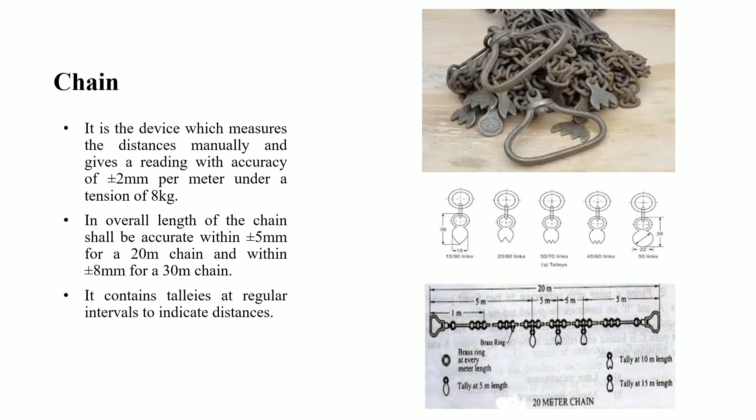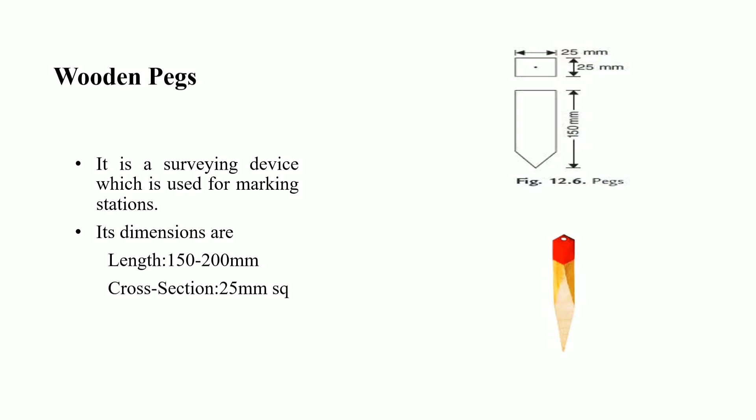It contains tallies at regular intervals to indicate the distances. Next, we will move towards wooden pegs. A wooden peg is a surveying device which is used for marking stations. Its dimensions are length 150 to 200 mm and cross section 25 mm square. Next is arrows. They also help to mark the stations. They are made of 4 mm diameter steel wire and the length is around 400 mm. A ring is present at the end of the arrow which helps the surveyor to drive it into the ground.

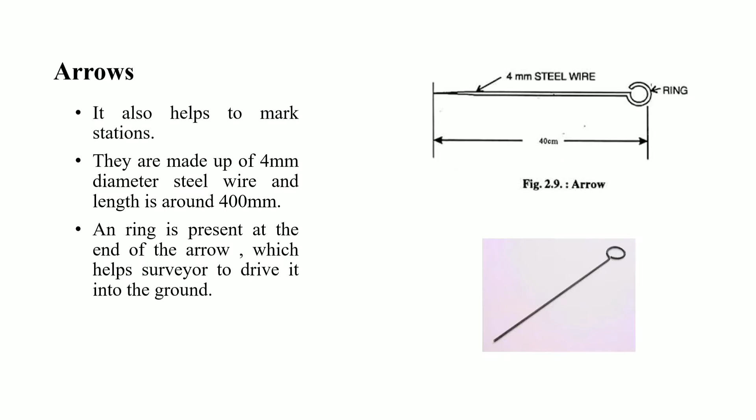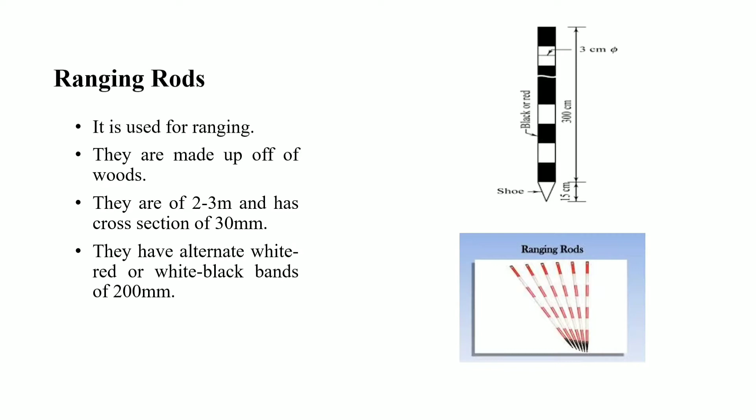Ranging rods. They are used for ranging. They are made of wood. They are 2 meters to 3 meters long and have a cross section of 30 mm. They have alternate white-red or white-black bands of 200 mm. Next is ranging poles. They have the same purpose as ranging rods. The only difference between the ranging rod and ranging pole is size, as its length varies from 4 meters to 6 meters and its cross section varies from 60 mm to 100 mm.

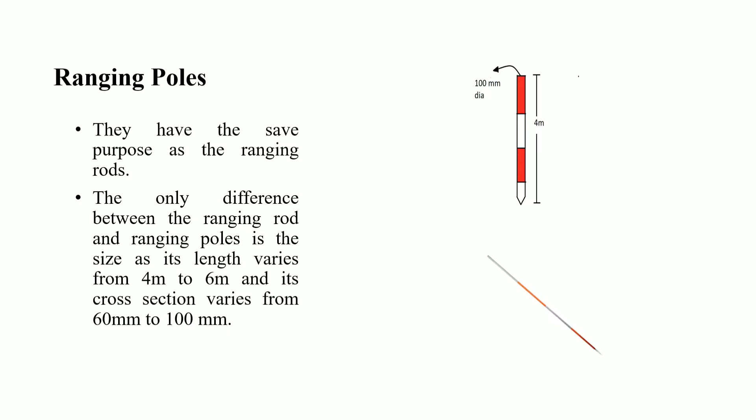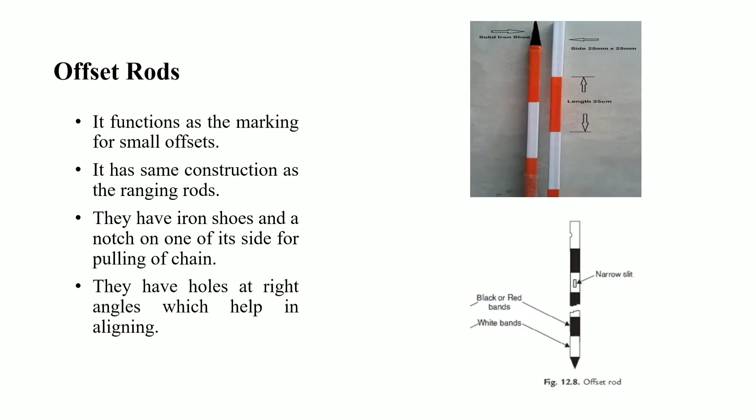Next is the offset rod. Its function is to mark small offsets. Its construction is the same as the ranging rod with minor differences. They have iron shoes and a notch on one side for pulling the chain. They also have holes at right angles which help in aligning. It means when we align the ranging rods with a particular offset rod, we have to look through these holes so that we can get proper alignment.

Then we have laths and whites, which are the last component of chain survey. Laths and whites are generally used to mark the ends instead of ranging rods and are made of soft wood. They help to mark the endpoints, that is the end stations. Generally, the length of laths and whites is around 1 meter. Whites also serve the same purpose as laths. A groove is made at the end of the laths and whites so that a paper can be inserted into it for proper visibility. With this, the components of chain survey and their uses end.

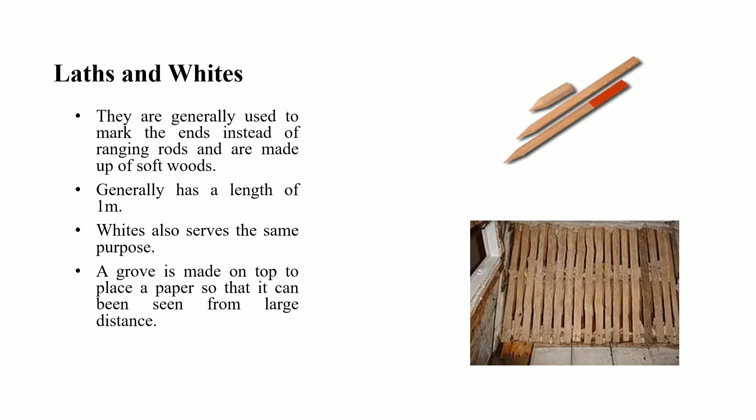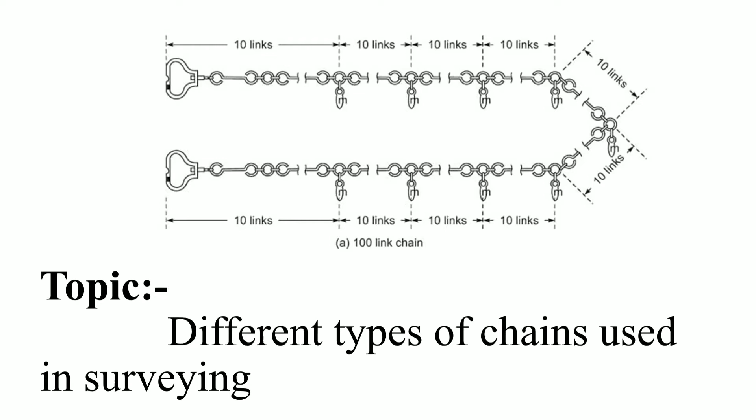Hello everyone, my name is Mohammed Safwan and today I'm going to give a presentation on the topic different types of chains used in surveying. First one. Metric chains are the most commonly used chain in India. These chains come in many lengths such as 5, 10, 20 and 30 meters. Most commonly used is the 20 meter chain. Tallies are provided at every 2 meters of the chain for quick reading. Every link of this type of chain is 0.2 meter.

The total length of the chain is marked on the brass handle at the ends. Center tallies have 2 teeth and tallies at the opposite sides of it have 1 tooth each. A 30 meter chain has 150 links each of 0.2 meter. Tallies are provided after 25 links, or 5 meters. A round brass ring is fixed after every meter.

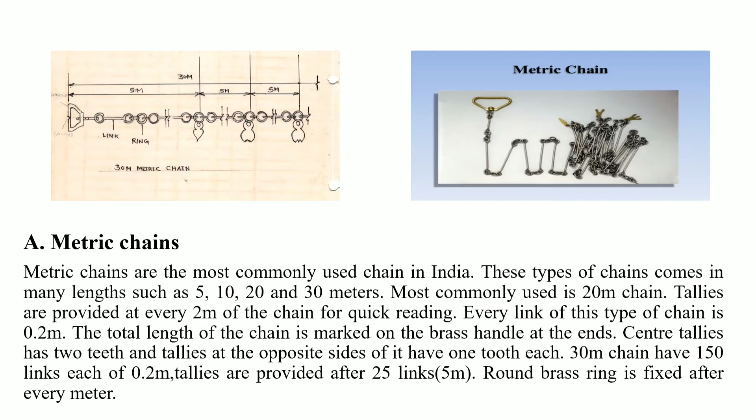Steel band or band chain. These chains consist of a long, narrow strip of steel of uniform width of 12 to 16 mm and thickness of 0.3 to 0.6 mm. This chain is divided by brass studs at every 20 cm, or instead of brass studs, a band chain may have graduated engravings in centimeters. For easy use and workability, band chains are wound on steel crosses or metal reels from which they can be easily unrolled. These steel bands are available in 20-meter and 30-meter lengths and a width of about 12 to 16 millimeters.

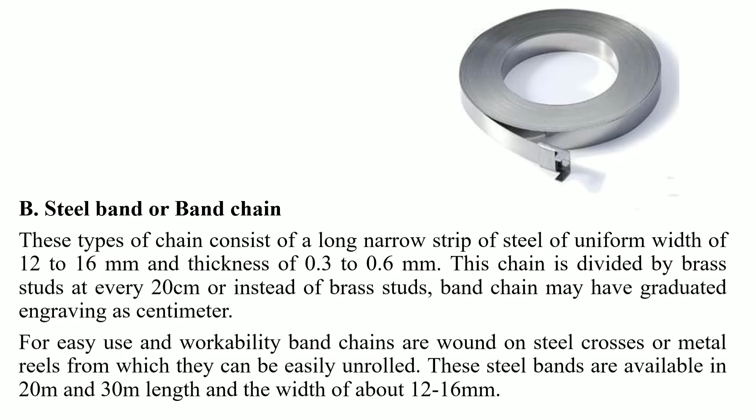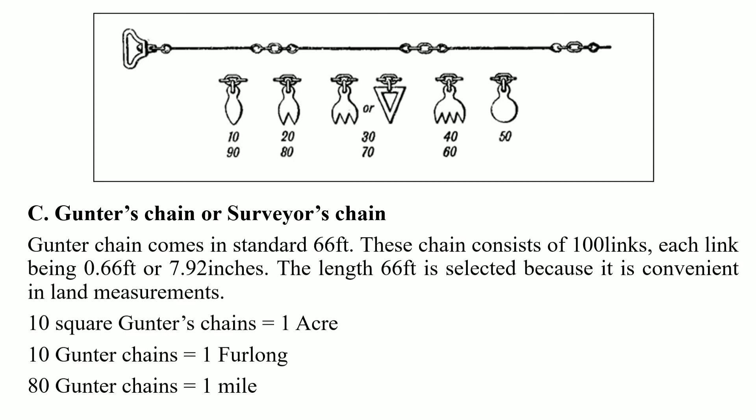Gunter's chain or surveyor's chain. Gunter's chain comes in a standard 66 feet. This chain consists of 100 links, each link being 0.66 feet or 7.92 inches. The length of 66 feet is selected because it is convenient in land measurements. 10 square Gunter's chains is equal to 1 acre, 10 Gunter's chains is equal to 1 furlong, and 80 Gunter's chains is equal to 1 mile.

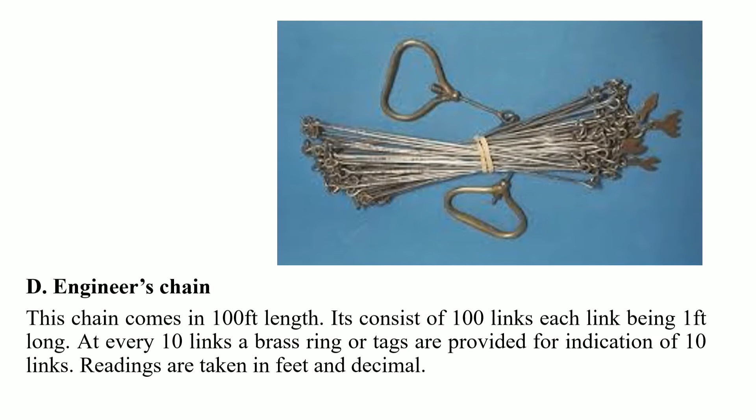Engineer's chain. This chain comes in 100 feet length. It consists of 100 links, each link being 1 foot long. At every 10 links, a brass ring or tag is provided for indication of 10 links. Readings are taken in feet and decimals. Revenue chain. The standard size of this type of chain is 33 feet. The number of links is 16, each link being 2 1/16 feet. This chain is commonly used in cadastral survey. The 5 types of chain are over.

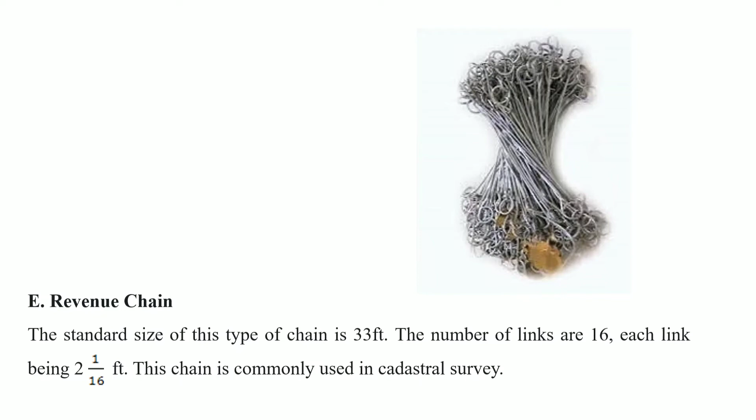Now we'll talk about some advantages of chain survey. Chain survey is the simplest and commonest method used in surveying exercises. The equipment used to conduct chain survey is very simple to use. The equipment used in chain survey can easily be replaced. For example, measuring rods can be replaced with measuring tape. This method does not involve complicated mathematical calculation. In chain survey, few people are needed to conduct the survey. Normally, a chain survey team has 3 people, a booker, a leader, and a follower.

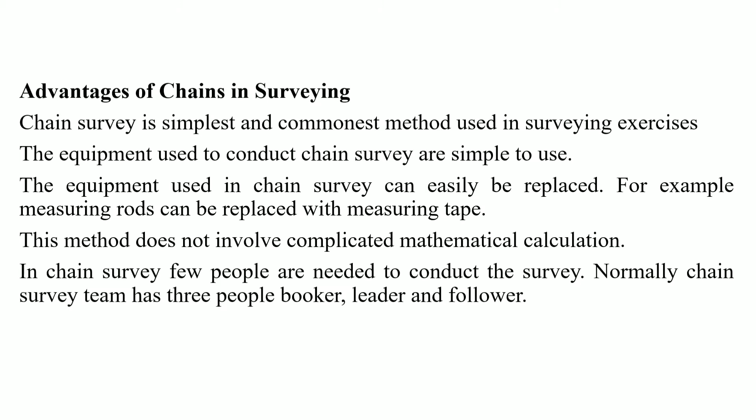Hello everyone, this is Gyanasagar and I am going to discuss the different types of tapes used in surveying.

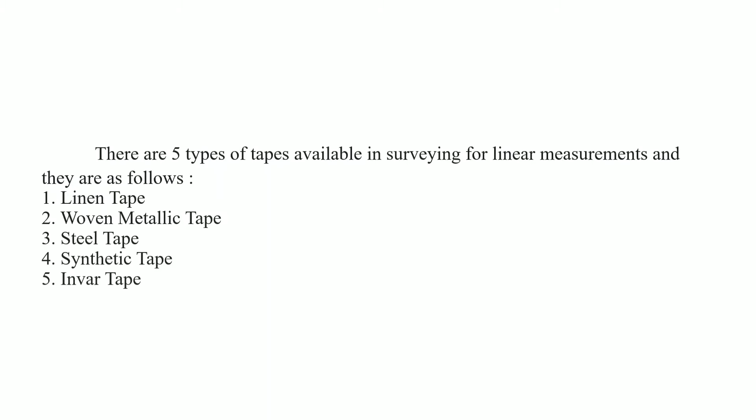There are 5 types of tapes available in surveying for linear measurements, and they are linen tape, woven metallic tape, steel tape, synthetic tape, and the invar tape. First of all, let us discuss the linen tape in detail.

The linen tape, also known as cloth tape, is a varnished strip made of closely woven linen. The width of the strip is about 12 to 16 millimeter. It is available in different lengths such as 10 meter, 20 meter, 30 meter, and 50 meter. Both the ends of the linen tape are provided with metallic handles, and the whole tape is wound in a leather or metal case. Linen tapes are light in weight and easy to handle.

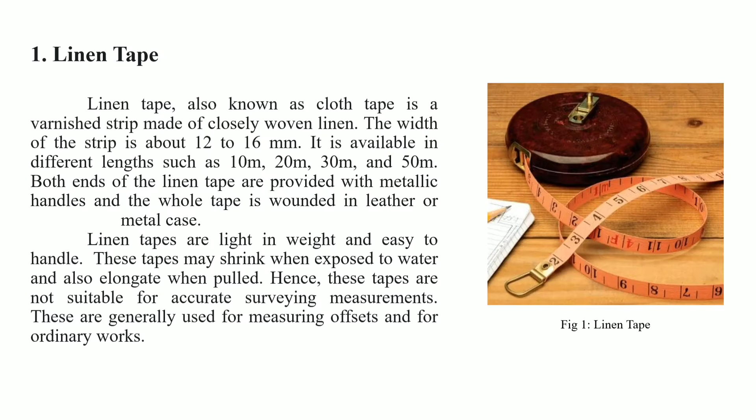Let us discuss the woven metallic tape. The metallic woven tape is an improved version of the linen tape. Brass or copper wires are used as reinforcement for the linen material. Hence, it is more durable than normal linen tape. A brass ring is provided at the end of the tape, which is included in the length of the tape.

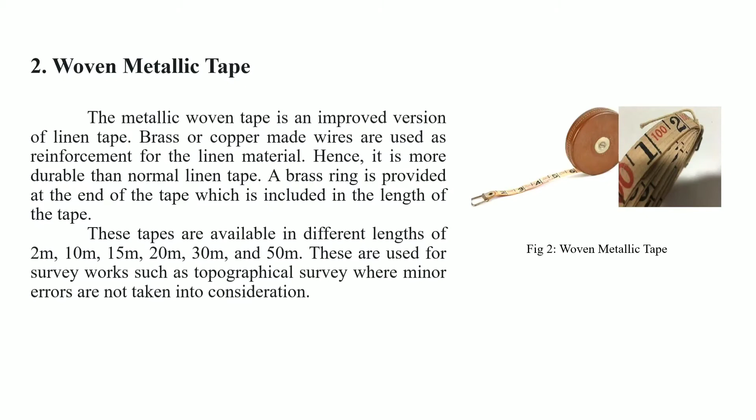Now let us discuss the steel tape. A steel tape is made of steel or stainless steel. It consists of a steel strip 6 mm to 16 mm wide. It is available in lengths of 1 meter, 5 meter, 8 meter, 10 meter, 20 meter, 30 meter, and 50 meter. Meters, decimeters, and centimeters are graduated on the steel strip.

Steel tapes generally come with a metal case with an automatic winding device. The tape is withdrawn from the case by hand during measuring, and it is rewound into the case by just pressing a button provided on the case. Steel tapes are not flexible and are suitable for measuring leveled surfaces only.

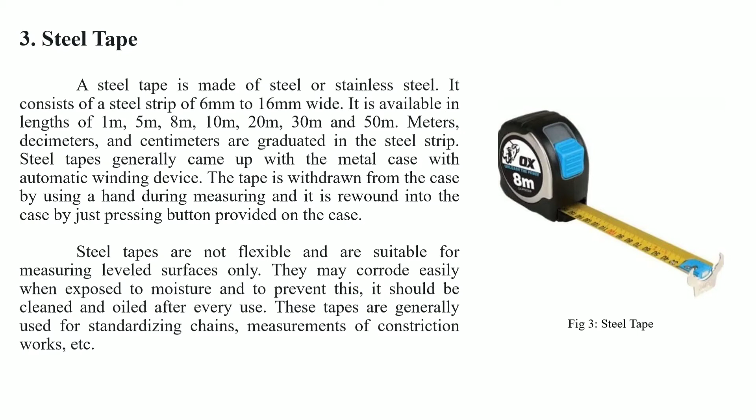They may corrode easily when exposed to moisture, and to prevent this, they should be cleaned and oiled after every use. These tapes are generally used for standardizing chains, measurements of construction works, etc. You can see the picture of a steel tape in the figure.

Now let us discuss the synthetic tape. Synthetic tapes are made of glass fibers coated with PVC. These are light in weight and flexible. They are available in lengths of 5 meter, 10 meter, 20 meter, 30 meter and 50 meter. Synthetic tapes may stretch when subjected to tension. Hence, these are not suitable for accurate surveying works.

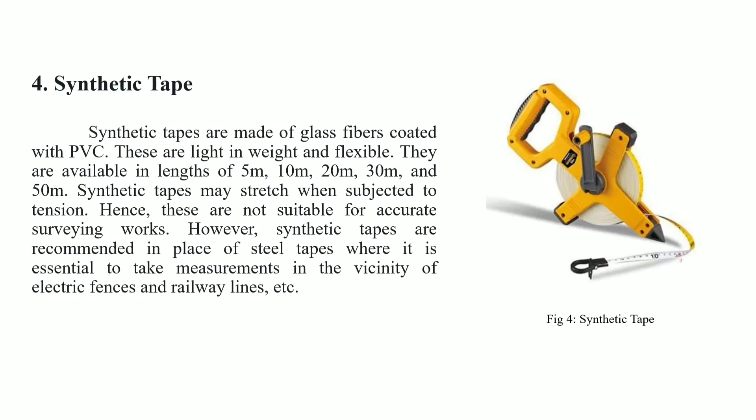Now let us discuss the invar tape. Invar tapes are made of an alloy which consists of 36% nickel and 64% steel. Invar tape contains a 6 mm wide strip and is available in different lengths of 30 meter, 50 meter and 100 meter. The coefficient of thermal expansion of invar alloy is very low. It is not affected by changes in temperature.

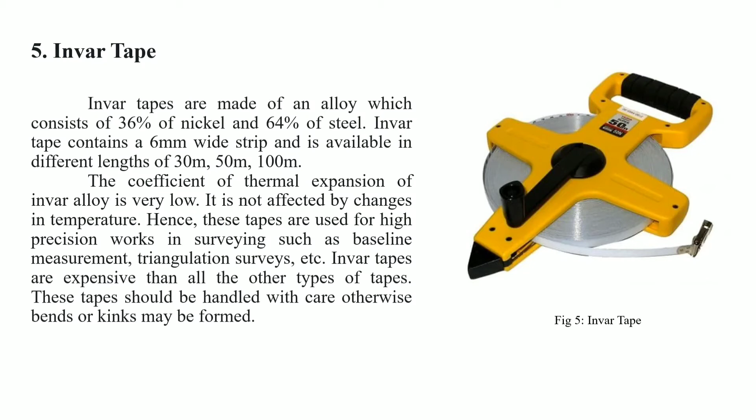Hello everyone, this is Shivam Das, and today I will be discussing the suitability of chain survey, important stations and important lines used in chain survey. So let's have a brief introduction about what chain survey is.

Chain survey is used in case of linear measurements. It is mostly used for small plane areas. In chain survey, the total area is divided into a number of triangles of suitable sides. The network of triangles is preferred as the triangle is the simplest plane geometrical figure which can be plotted using the length of the sides.

Now let's get to the suitability of chain survey. Chain survey is suitable when the area to be surveyed is comparatively small in size. It is ideal when the ground is fairly level and open with small details. When the measurements can be read easily and repaired in the field itself, chain survey is mostly used. For repeated and rough uses, it is suitable.

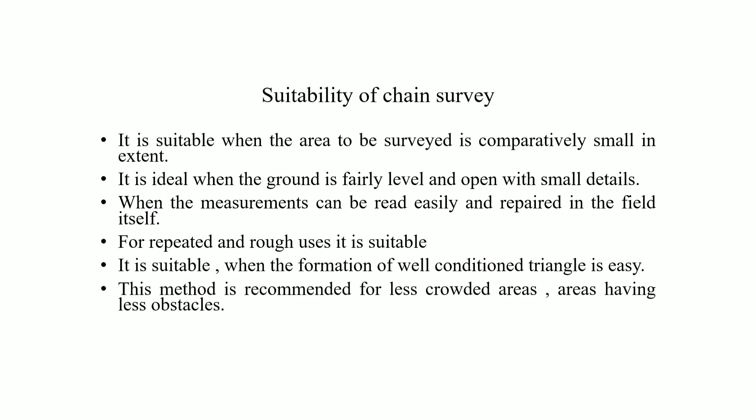Chain survey is suitable when the formation of well-conditioned triangles is easy. Again, the method is recommended for less crowded areas and areas having fewer obstacles. So now let's have some idea about the important stations in chain survey. The first type is the main stations.

Main station is a prominent point on the chain line, which can be either at the beginning of the chain or along the boundary line. It acts as a reference for the different intermediate lines.

The second type is the tie or subsidiary stations. Stations on the main survey lines or any other survey lines are known as tie stations. These are used to fix the direction of adjacent sides of the triangle. When the triangulation is not possible, the station is used to locate their interior details.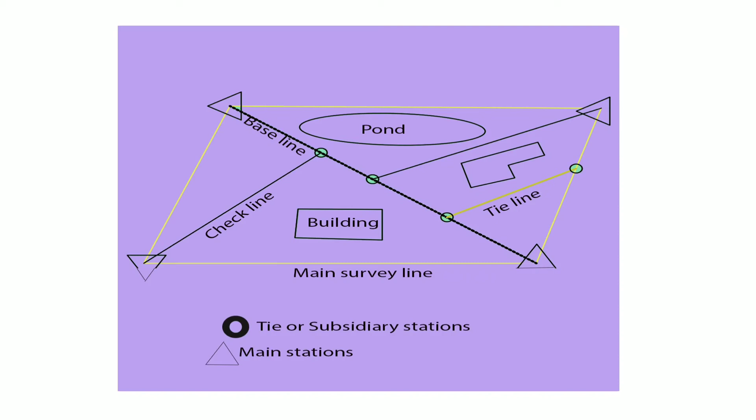Now let's have a clear idea about the lines used in chain survey. This is a figure of the field work where the sides of the triangle are denoted by the check lines and the base line and the tie line. The line AB denotes the check line, whereas the line CD denotes the base line and the side EF denotes the tie line.

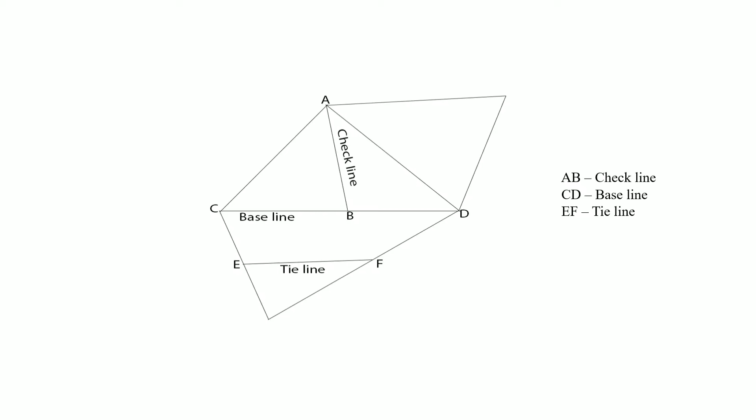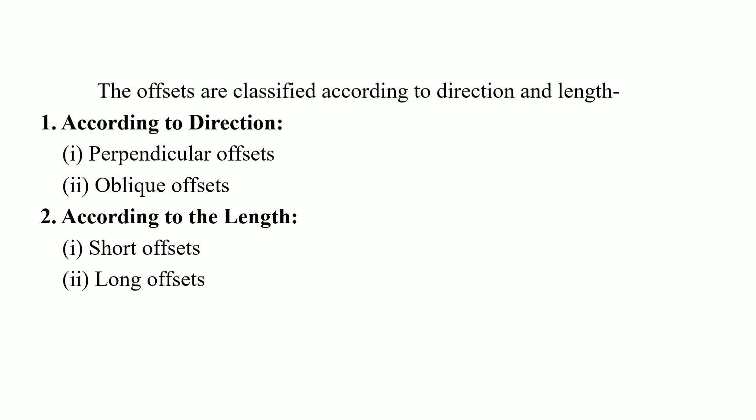Today I am going to talk about different methods of making offsets. So first of all, the offsets are classified according to direction and length. According to direction, it is of two types, perpendicular offsets and oblique offsets. According to length, short offsets and long offsets.

Firstly, let us discuss perpendicular offsets. The distances measured at right angles to the chain line from the objects are known as perpendicular or rectangular or right offsets, such as CD as shown in the figure. Usually the offsets are perpendicular offsets. In the strict sense, an offset means a perpendicular offset.

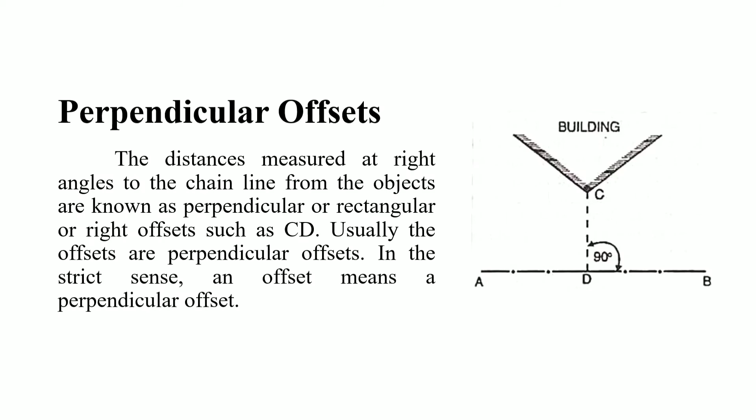Now let's talk about oblique offsets. All offsets which are not at right angles to the main survey lines are known as oblique or tie line offsets, such as CD and CE as shown in the figure. When the object to be plotted is at a long distance apart from the chain line, or it is an important one such as a corner of a building, oblique offsets are taken.

They are also taken to check the accuracy of right-angled offsets and to locate the position of stations in various surveys. Sometimes they help in reducing the number of main survey lines.

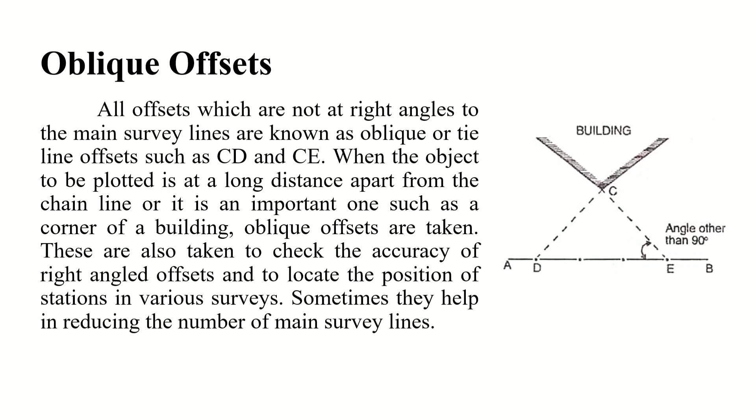Now, according to the length. Generally, the offsets are called short when they are less than 15 meter in length and long when their length exceeds 15 meter. The offsets should as far as possible be short ones, as they are less liable to be erroneous due to incorrect length of tape or incorrect direction than if they are long. Also, short offsets can be measured more quickly and accurately than long ones. Tie lines should be drawn to avoid long offsets.

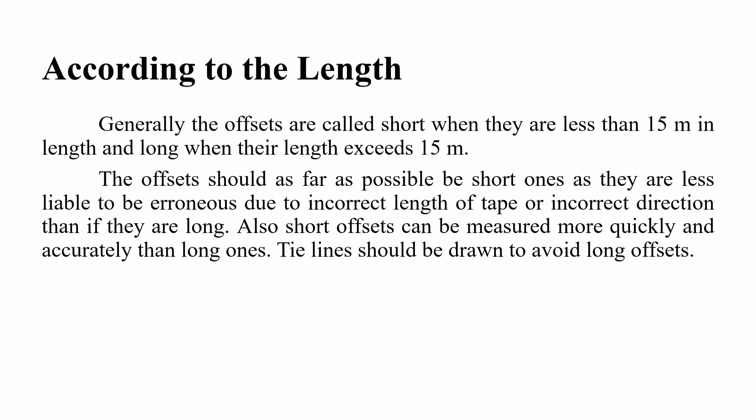Now let us see an example. The question is, the length of the offset is 15 meter and the scale of the plan is 10 meter to 1 centimeter. If the offset is laid out 3 degrees from its true direction, find the displacement of the plotted point on the paper, first, perpendicular to the chain line and second, parallel to the chain line.

Now let's talk about the solution. Let AB be the actual length of offset which is 15 meter long and deflected by 3 degrees from its true direction. Here BC equals displacement parallel to chain line and CD equals displacement perpendicular to chain line. Now first, CD equals AD minus AC, which equals AB minus AC, and equals 15 minus 15 cos 3 degree, which equals 15 × (1 − cos 3°) meter.

Since the scale is 1 centimeter to 10 meter, 10 meter on the ground equals 1 centimeter on the map. Now 15 × (1 − cos 3°) on the ground equals 15 × (1 − cos 3°) divided by 10, which equals 0.002 centimeter on the map. Required displacement perpendicular to chain line equals 0.002 centimeter on paper.

Now second, BC equals AB sin 3 degree, which equals 15 sin 3 degree and equals 0.7850 meter, which is the displacement on the ground. Now displacement parallel to chain line equals 0.7850 divided by 10, which equals 0.0785.